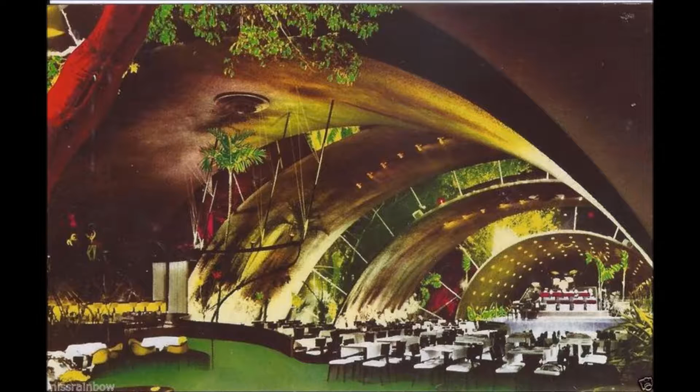The Sala de los Arcos de Cristal, or Room of the Crystal Arches, is the interior performance hall of the famous Tropicana Cabaret located in Havana, Cuba. The nightclub was built on the grounds of a mansion owned by a wealthy socialite who decided to rent the property to a group of entrepreneurs who wanted to build there due to the area's tropical beauty.

The club opened on New Year's Eve in 1939 and quickly began attracting well-known performers and social elites, such as Bola de Nieve, Rita Montaner, and Nat King Cole. The success of the club prompted entrepreneur Martin Fox, a well-known under-the-table gambler, to take over management of the Tropicana and turn it into a popular gambling spot.

As the club's popularity grew, Fox commissioned the first indoor section of the nightclub to accommodate crowds on days of bad weather. Having worked previously with Max Borges on the design of his own home, Fox requested Borges build a covering for a large hall area, with the only directive being that Borges not cut down any trees, a necessary measure to ensure that the new structure highlighted the surrounding foliage. This led to Borges' Arcos de Cristal, now known as one of the most compelling pieces of Cuban architecture.

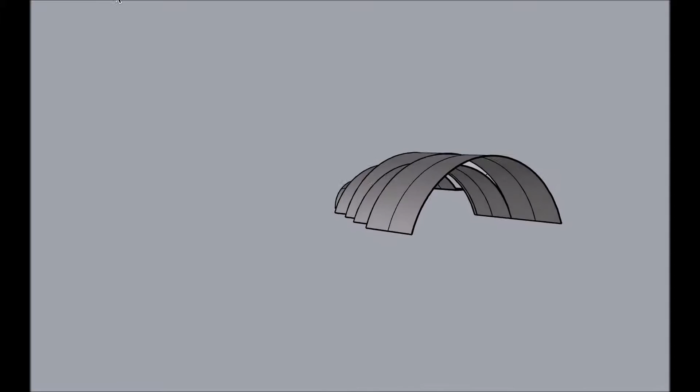The hall is composed of 5 slender reinforced concrete cylindrical arches, placed off-center and in decreasing order of height. Based on literature and confirmed by measurements taken on-site, the dimensions of the arches range in height from 16 to 33 feet high, with spans ranging from 40 to 90 feet. Measuring only 3 inches thick, the shell vaults provide only a thin separation between the garden-like exterior and soaring interior.

Panes of glass are layered in the spaces between the vaults and on the entire front face of the largest arch to allow for increased visibility of the lush garden greenery and velvety night sky. The thinness of the vaults was made possible because of the unique curve of the shells, which allowed Borges to transform the loading into pure axial forces.

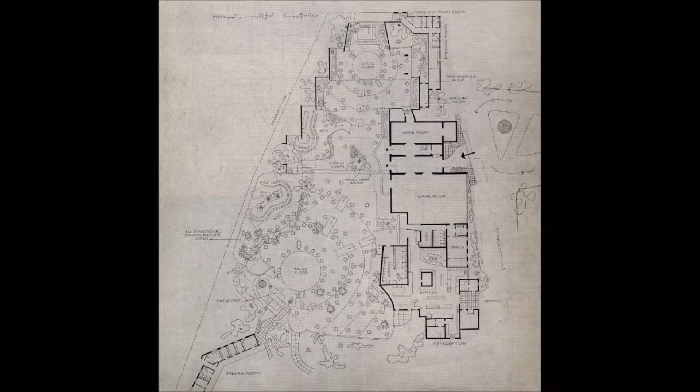The cylindrical arches are self-supporting, with the exception of one arch that is supported by 2 curved columns on one side. This was important because any support columns would have interrupted the flow of the structure and detracted from the open-air, cave-like aesthetic. A full-scale 3D model of the structure was created using Rhino software in order to get a better understanding of the hall's geometry. 3 of the shells stand on their own, connected to each other only by the glass windows, while the remaining 2 shells intersect and overlap one another.

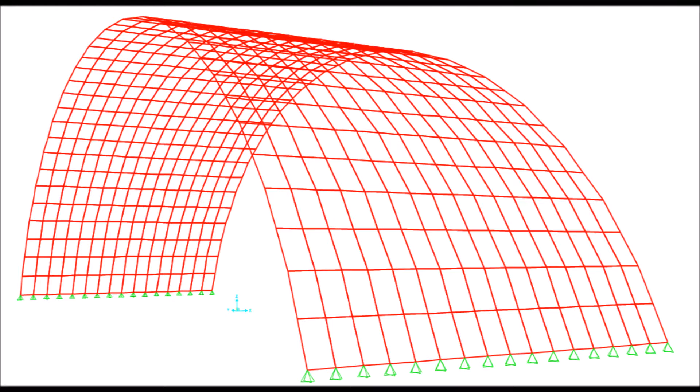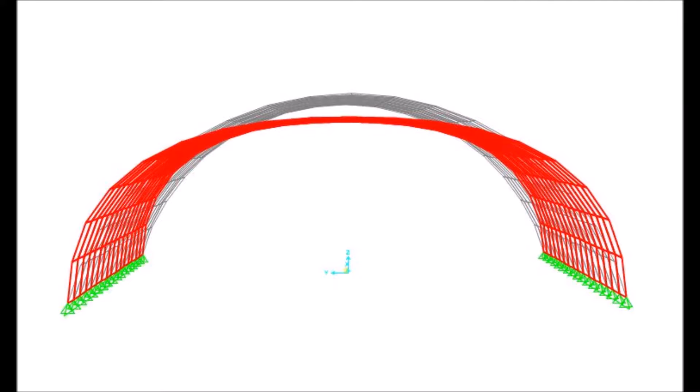The analysis performed on the structure was for thin, circular, cylindrical shells. Each of the 5 shells was analyzed separately in the structural analysis program SAP 2000, and also by hand using membrane theory. The boundary conditions were set to pin-pin, and only the self-weight of the structure was considered for analysis. Based on the loading conditions, we were able to verify that the forces are greatest at the bottom and smallest at the top, and that the self-weight of the structure causes symmetric stress resultants and deflections. The majority of each shell is in compression, which is expected based on the gravitational effects on the geometry.

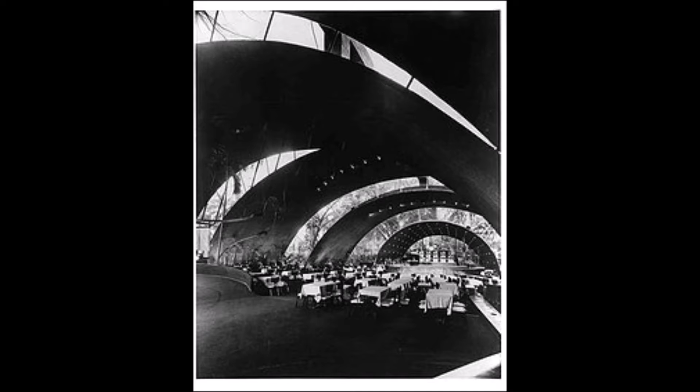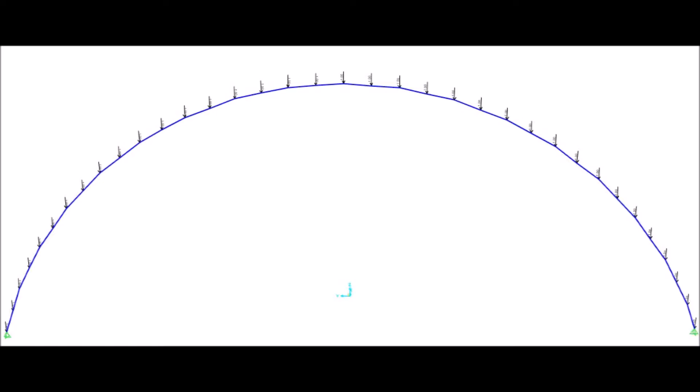The architecture exhibited by the Tropicana and other contemporary Cuban structures represents a bold and abstract language that rejuvenated the Cuban aesthetic while harmoniously melding with the architecture of old. The shell form of the Arcos de Cristal represents a new holistic architecture between space, time, heritage, and landscape. Artists and architects in Cuba during the mid-century period strove to embrace the modern spirit in a new cultural environment while still trying to capture national values, a goal which was achieved in Max Borges' timeless structure, the Arcos de Cristal.